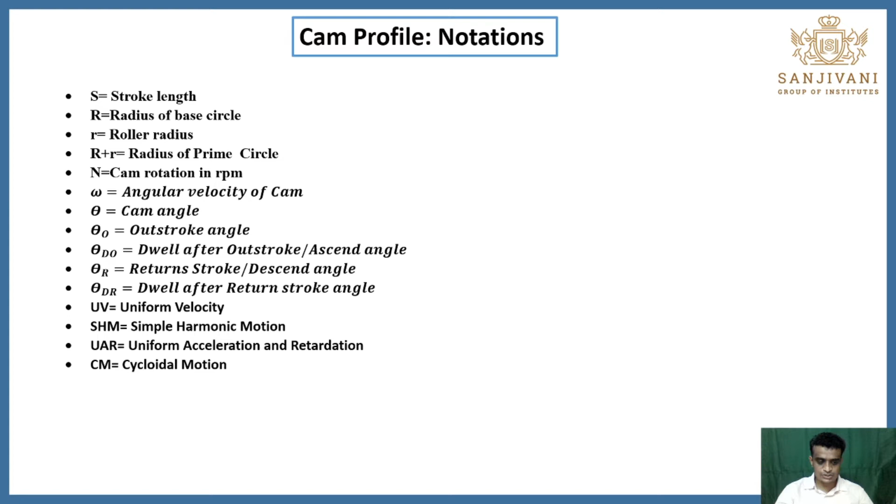These are some notations: UV means uniform velocity, SHM is simple harmonic motion, UAR means uniform acceleration and retardation, and cycloidal motion is CM. Now we'll start with the cam profile for the knife edge follower. According to the follower, we need to design the cam profile. In this case, our task is to draw the cam profile for the knife edge follower.

Now we'll read the problem statement. You have to read the problem statement very carefully. A disc cam is to give simple harmonic motion to a knife edge follower during outstroke of 50 mm. Outstroke means this is the stroke length of 50 mm. The angle of ascent is 120 degrees. Dwell after the ascent is 60 degrees. Angle of descent is 90 degrees. And the remaining you need to calculate, which is the dwell after the descent.

The minimum radius of the cam is 50 mm. That means this is the base circle radius, which is capital R. Draw the cam profile when the axis of the follower passes through the axis of the camshaft. That means this is a radial knife edge follower which passes through the center of rotation.

Here we also need to calculate the maximum velocity and acceleration during ascent and descent. That part we are not going to focus on; our task is to draw the cam profile. But you need to concentrate on this also. We already studied this part while studying follower motions. One thing you have to keep in mind while using these formulas for Vmax: theta O and theta R have to be taken in radians.

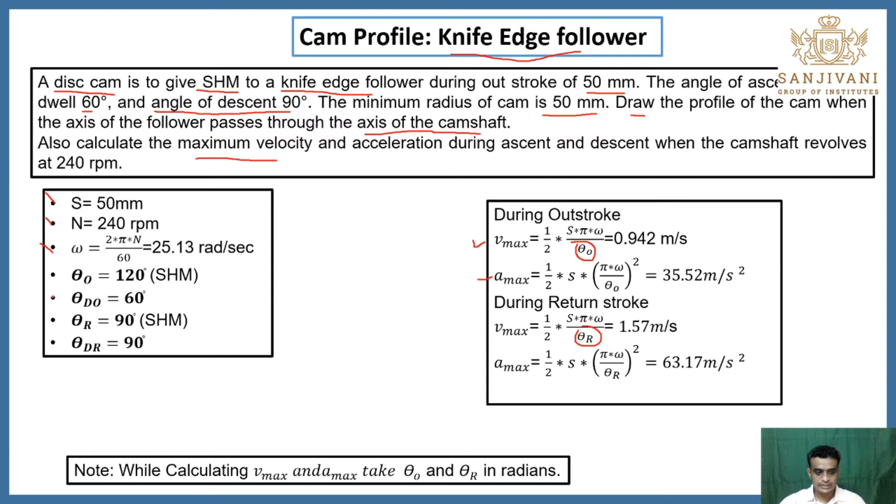Next you have to write down the given data: angular velocity, theta O, theta do, theta r, and theta dr. Using this you have to draw the displacement diagram, which we already studied, using simple harmonic motion: 120 degrees, theta O, theta r, theta dr on the cam rotation axis, and the vertical axis is the stroke length. Now we'll start the procedure. Watch this very carefully. It is very simple. If you get this, you'll definitely know how to draw the cam profile.

First you have to draw the center O. Next you draw a circle, the base circle, whose radius is equal to 50 mm. Next draw a vertical line through this point. Next draw the knife edge follower, because its line of action passes through the center of rotation. Now we have to divide this circle into four parts, taking the vertical line as the reference.

While dividing, we are taking the angles in the anti-clockwise direction. That means first in the anti-clockwise direction we take 120 degrees, next 60 degrees, 90 degrees, and 90 degrees. Keep in mind, in this case we are assuming the cam is rotating in the clockwise direction. In that case you have to take these angles in the anti-clockwise direction. If you assume the cam is rotating in the anti-clockwise direction, then you have to divide the circle into the four parts taking the angles in the clockwise direction.

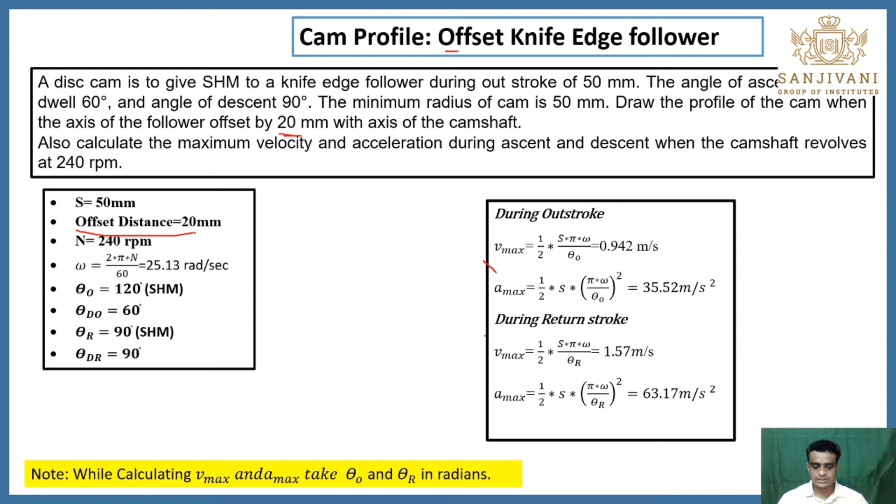Again, according to the available space constraint, we need to take this offset knife edge follower. Okay. Again, in this case we need to find out the maximum velocity and maximum acceleration. For that part you have to use these formulas. Only one change that we need to take, which is the offset distance of 20 mm. Okay. Now again here we have considered the follower motion with the simple harmonic motion. By following that procedure, we have drawn this displacement diagram. Now I will just draw this cam profile.

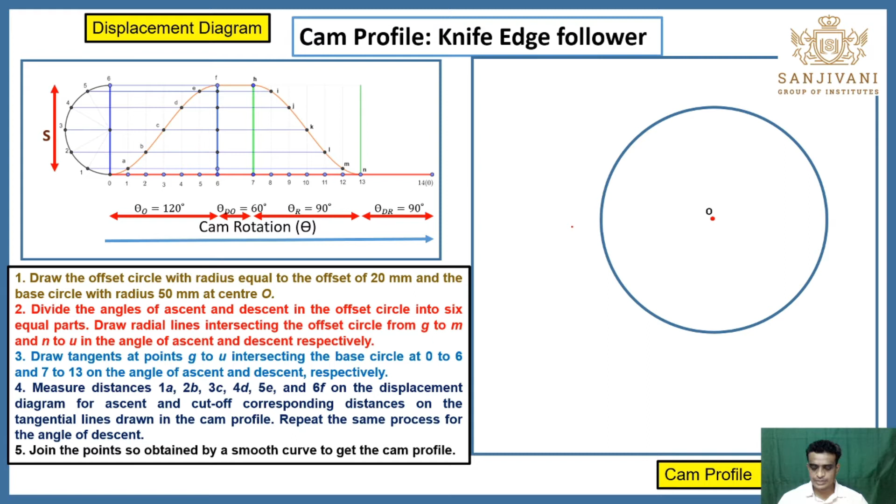Also I will just mark the center, which is O. Next I will draw the base circle. Next I will draw the offset circle whose radius is equal to 20 mm, which is given, and this is the offset circle. Now at this point I will draw one vertical line which must be tangent to this offset circle. I will just mark where it intersects the base circle. That point you need to mark. At that point you have to draw the knife edge follower just like the previous condition. Now you have to join this marked point with the O. Okay. Now this is your reference line.

With that reference line you need to divide this base circle into the four parts: theta O, theta dO, theta R, and the theta dR, last part. In this case also we are assuming that cam rotates in the clockwise direction. That's why we have taken this angle in the anti-clockwise direction. Okay.

Now again you have to divide this theta O into the 6 equal parts by taking this line as a reference. This is the first part, theta O into the 6 equal parts. Okay. Again you need to divide this theta R into the 6 equal parts, because here we have divided theta O into the 6 equal parts, theta R into the 6 equal parts. Same procedure we have to follow while drawing the displacement cam profile.

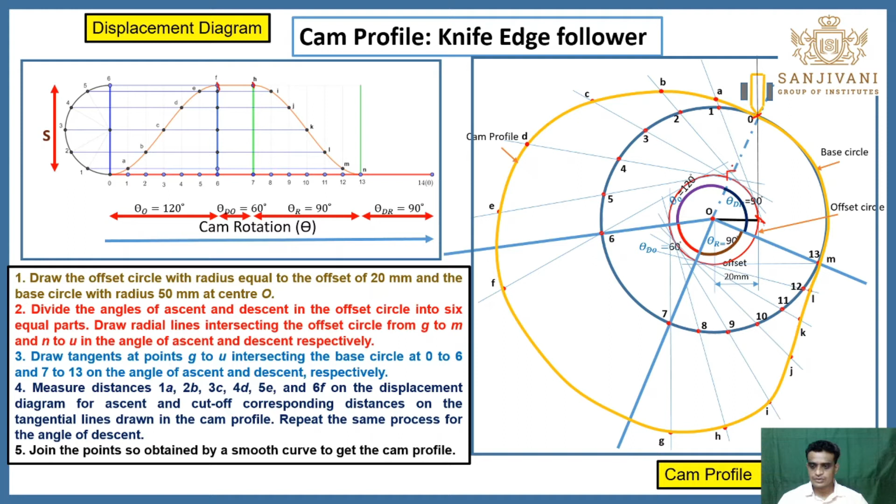In this way, you need to draw the cam profile for the offset knife edge follower.

Now we'll consider the cam profile for the roller follower. If we have the space available and if you want to reduce the wear, we use the roller follower instead of the flat knife edge follower.

In this case, if you read the problem statement, a cam of base circle of 50 mm wish to operate a roller follower of 20 mm diameter. That means radius of that roller is of 10 mm.

The follower is to have simple harmonic motion. The angular speed is 360 rpm. Draw the cam profile for a cam lift of 40 mm, that stroke is of 40 mm.

Angle of ascent is 60 degrees. Angle of dwell after ascent is 40 degrees. Angle of descent is 90 degrees. And again there is a dwell that we need to calculate. Also calculate the maximum velocity and acceleration during ascent and descent.

Sorry for this change. That theta O is of 60 degrees, theta DO is of 40 degrees, theta R which is again 90 degrees with the simple harmonic motion, and remaining angle which is the dwell after the return stroke. There is no follower motion, that's why no need to consider this.

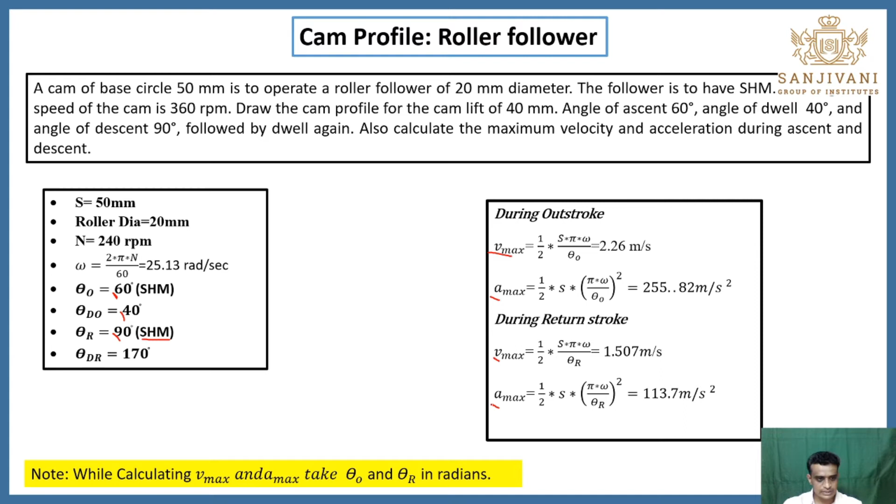Now we are going to draw the cam profile. Again you have to draw the displacement diagram with simple harmonic motion. Theta O, theta DO, theta R and theta DR will be given, and as per the simple harmonic motion you have to draw that displacement diagram.

Now we are going to draw the cam. Mark this point O. Next, draw one base circle. Through this point, draw one vertical line. On this vertical line, mark the distance base circle radius plus roller radius. You get this point. Through this point, draw the roller. This is O1 actually.

Next, through this center, mark the prime circle. This is the prime circle whose radius is equal to base circle radius plus roller radius. Now this is the base circle.

Now just divide with reference to this vertical line. Here we need to divide this prime circle into four parts with theta O, theta DO, theta R and theta DR. From this vertical line we take that angle in the anti-clockwise direction, because here we are assuming the cam is rotating in the clockwise direction. If you assume the cam is rotating in the anti-clockwise direction, then you need to take this angle in the clockwise direction. Now this is theta O, theta DO, theta R, theta DR.

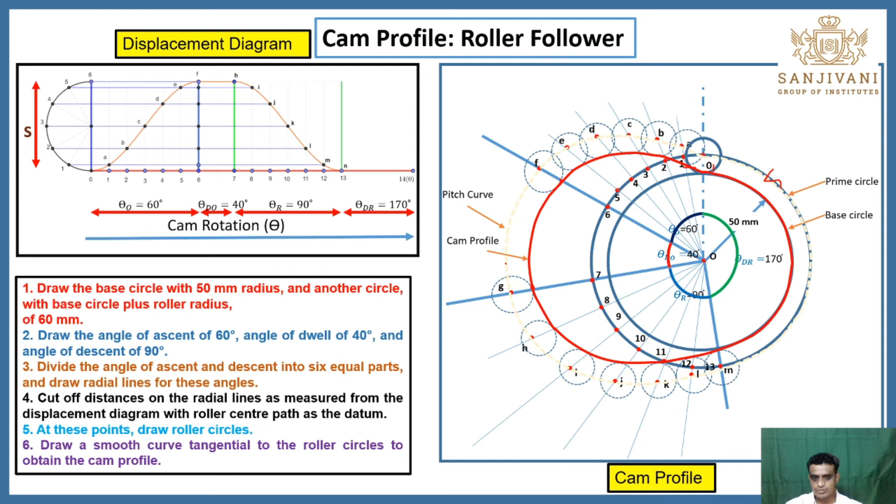Again you have to join points A, B, C, D, which gives you the pitch curve. In this way you need to finish this cam profile and give the proper notations and nomenclature. You will get good marks.

Now we are going to draw the offset roller follower. The problem statement is: a cam with 60 mm minimum diameter, that is 30 mm radius, with 20 mm lift, meaning the stroke length is 20 mm, rotating clockwise at uniform acceleration and retardation with 1200 rpm, has to give the following motion to the roller follower with 10 mm diameter, that means the roller radius is 5 mm.

Next, outstroke: the follower is to move outstroke for 120 degrees with uniform acceleration and retardation, then dwell for the next 60 degrees, then return during 90 degrees. Nothing else is mentioned, so you have to consider uniform acceleration and deceleration, and dwell during the remaining period. Again draw the cam profile if the cam axis is offset by 20 mm from the follower axis, meaning the offset distance is 20 mm and roller diameter is 10 mm.

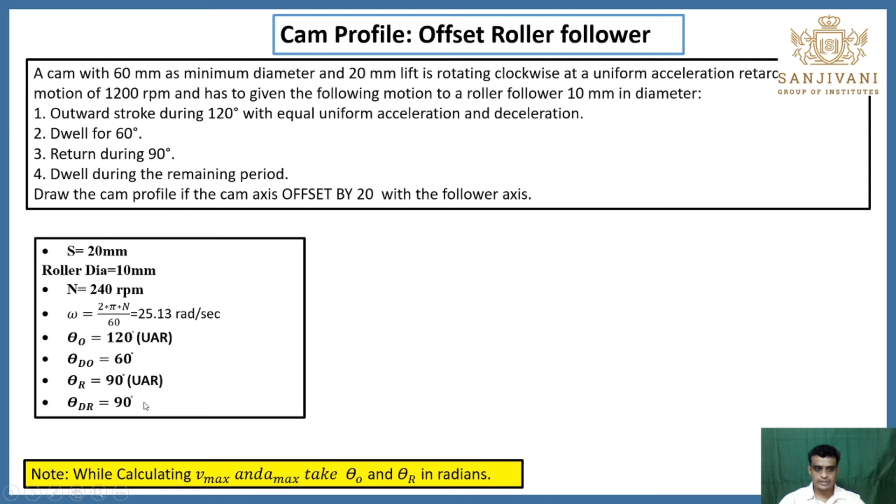Now we have to draw this cam profile considering all this data. The stroke length is given accordingly. By using the uniform acceleration retardation motion, you need to draw the displacement diagram. Next, after drawing this displacement diagram, we need to draw the cam profile.

Again you have to mark the center point O. Next you have to draw the base circle whose radius is equal to 30 mm. Next you have to draw the offset circle whose radius is equal to 20 mm. Now through this point you have to draw one vertical line and mark this point.

Next you have to consider the radius. On this vertical line you need to consider the radius of the roller in such a way that the roller is tangent to the base circle, and mark this point. After marking this point you have to draw this circle. Next, through this point you have to draw the prime circle. This is the prime circle.

Okay, now after drawing this prime circle, taking this as a reference, you have to divide this prime circle into four parts. This is the first part, second part, third part, as we divided into theta O, theta DO, theta R, and theta DR. These angles are 120 degrees, 60 degrees, 90 degrees, 90 degrees.

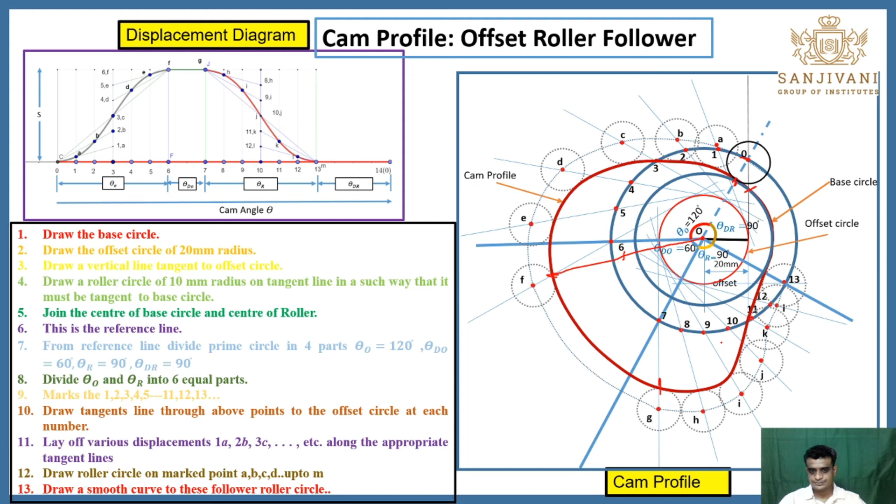Now we are going to draw the cam profile for the flat face follower. In this case we need to draw this with the cycloidal motion. A flat face reciprocating follower has the following motion with cycloidal motion: angle of ascent 80 degrees, angle of dwell 80 degrees.

Return stroke 120 degrees, and remaining is again 80 degrees. Base circle diameter is 60 mm, stroke length is 50 mm. The line of motion of the follower passes through, that means this is the radial follower.

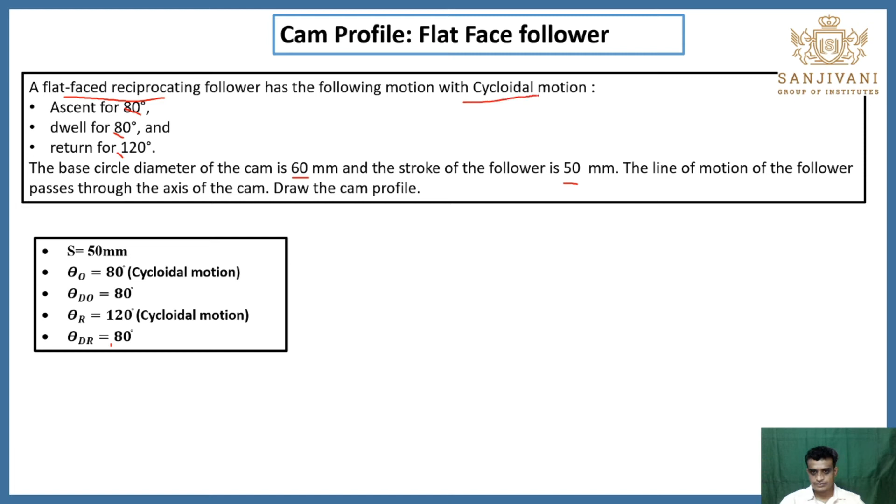Now we need to draw the cam profile for the flat face reciprocating follower with cycloidal motion. Now we'll start to draw the cam profile.

Before starting, we need to draw the displacement diagram using cycloidal motion. You need to draw that displacement diagram by taking the circle, radius of the circle equal to r is equal to s upon 2 pi, where s is equal to stroke. You need to consider this and follow the procedure of the displacement diagram, that video I have already uploaded.

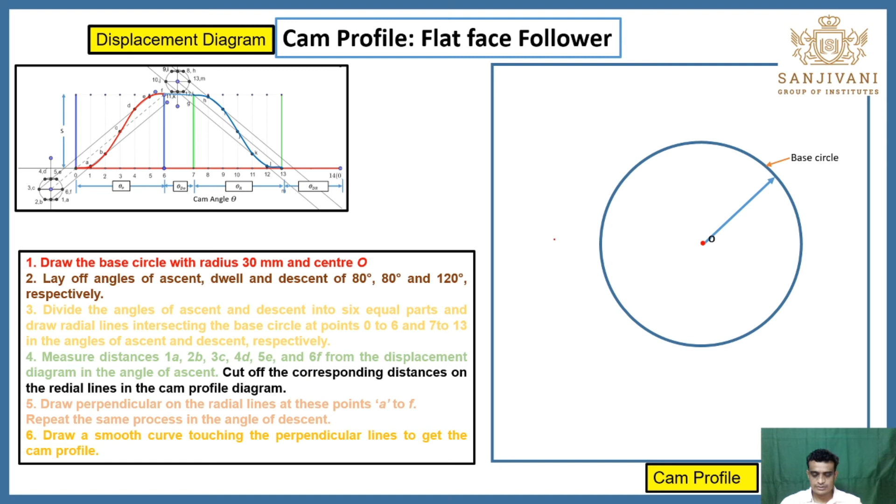Now we'll start to draw the displacement cam profile. First of all, you have to mark the center, draw the base circle equal to 30 mm. Next, here you have to draw that...

Next, again from this vertical reference, you need to divide this base circle into the 4 parts: one is the outstroke angle, next one is the dwell, next one is the return stroke, and again dwell. Now, just like this, here we have divided this into 6 parts and return stroke into 6 equal parts. Again here also you need to follow the same. You have to divide the outstroke angle into 6 equal parts and return stroke into 6 equal parts.

Okay, next, these equal parts you need to join, or before that you have to give the notations. Now you need to join these parts with the center. You have to draw the faint lines on these points. Now you have to mark these distances 1a, 2b, 3c like this. After marking these points you have to give the notations a, b, c, d that we have already mentioned over here.

After marking these points, now you have to draw the flat face, in such a way that it must pass through this point A, but perpendicular to this line OA, OB, OC like this. You need to draw this line such that it must be perpendicular to these extended lines, that means O to B. Just like this. I think these are not visible, but just try to understand this by the yellow lines.

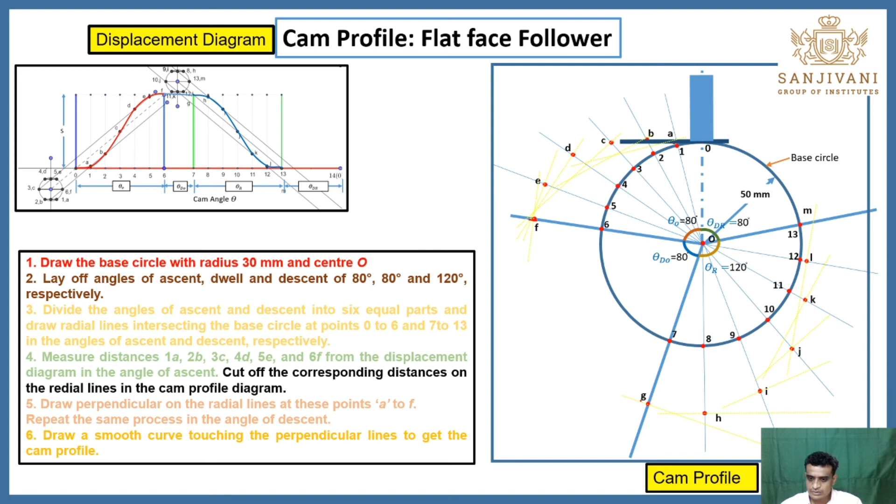You have to draw this line perpendicular to OA, OB, OC, OD, OE, OF, OG, OH, OI, OJ, OK, OL, and OM. Next, in the last step, you have to draw the cam profile in such a way that this profile must be tangent to all these follower positions, and for this portion, you have to take this distance in compass, draw one circular arc, and complete the cam profile.

Okay, this is the overall method to draw the flat face follower. Just concentrate on this follower position. This must be perpendicular to OA, OB, and all these positions.

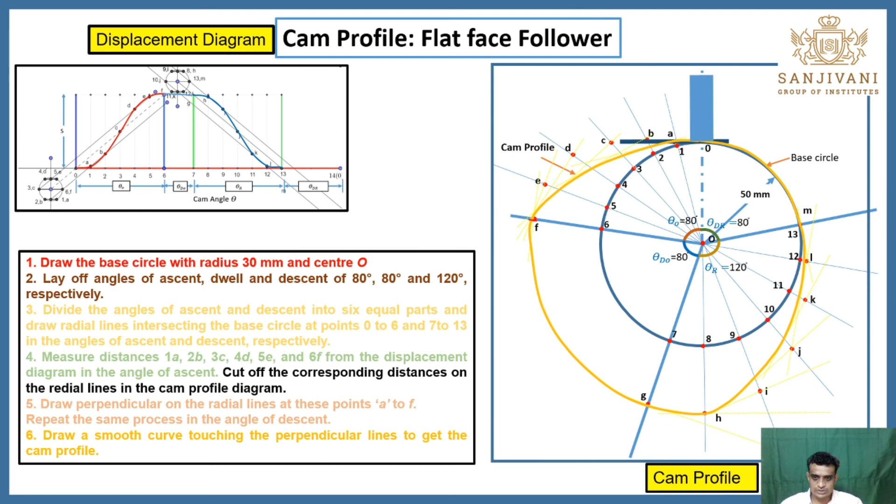Next, the last profile is the cam profile for the oscillating roller follower. In this case, a cam operating an oscillating roller follower having uniform velocity. Draw the cam profile for the given data below. The roller center from the cam center at the beginning of ascent is 60 mm. I will explain to you the meaning of this distance.

Minimum radius of the cam is 40 mm, that means base circle. Next, dwell is 40 degrees. Angle of ascent is 90 degrees, and angle of oscillation of the arm during ascent and descent is 15 degrees. Right now we have just read the problem statement. What is the meaning of this oscillating roller follower?

The oscillating roller follower is one of the types of cam and follower where rotary motion is converted into oscillating motion like this. Now in this case, the total angle during ascent and descent is 15 degrees. And the length of the arm is 80 mm.

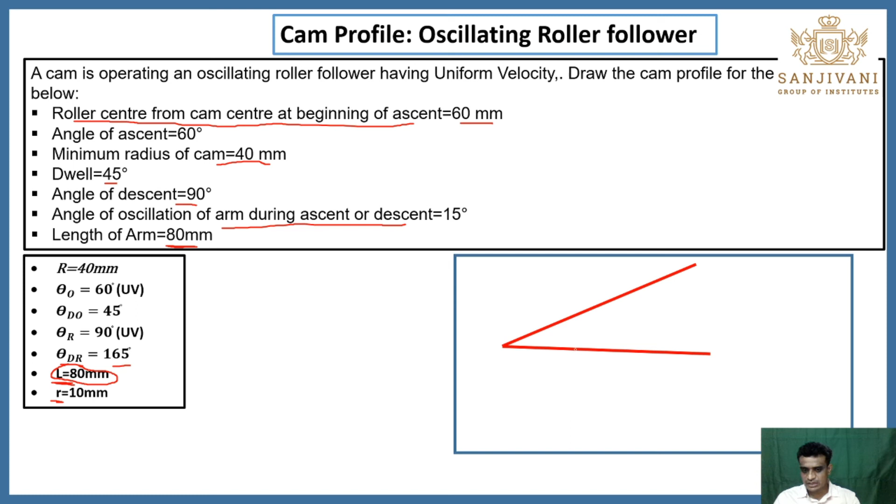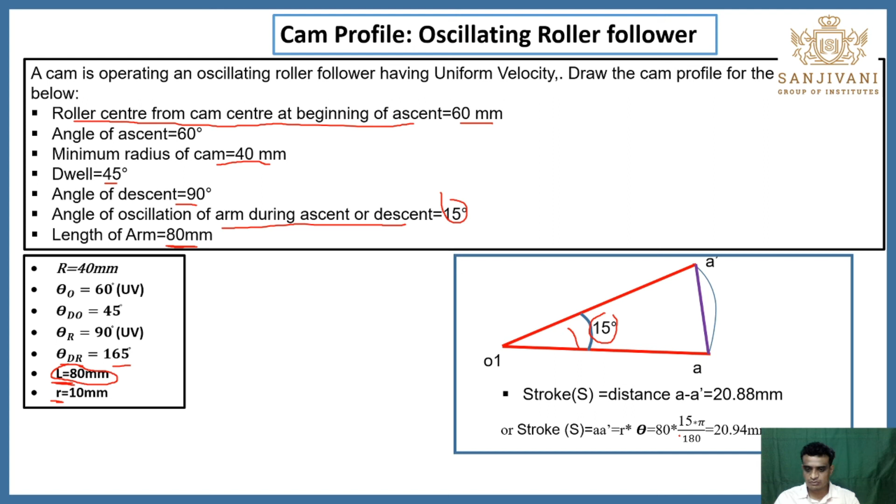Draw this arc and measure this distance A A dash, which is equal to 20.88 mm. This is the total stroke of this oscillating roller follower, which is given in terms of degrees, but while drawing the displacement diagram we require the stroke, calculated using this method. Or with the second method, you can calculate the stroke just like the arc length. Now we are going to draw the cam profile for the oscillating roller follower.

In this case, first we need to draw the displacement diagram, using the uniform velocity. The stroke length is given, which we have calculated. According to that, from the given data we have drawn this displacement diagram. Next task is to draw the cam profile. Here you'll find that all these details are mentioned over here.

I'll just draw. First of all, we need to mark the fixed point O, which is the center of rotation of the cam. Next we need to draw the base circle. Next we need to draw the vertical line. On this vertical line we need to draw the prime circle. The prime circle radius is equal to base circle radius plus roller radius, because in this case this is the oscillating roller follower. That means we need to add the radius of the roller.

Next we need to draw the pivot circle. For this pivot circle, the center distance between the center of rotation of the cam and the pivot is given to us. According to that we need to draw the pivot circle. After getting the pivot circle, we also know the length of the follower, but we don't know the exact location of the pivot.

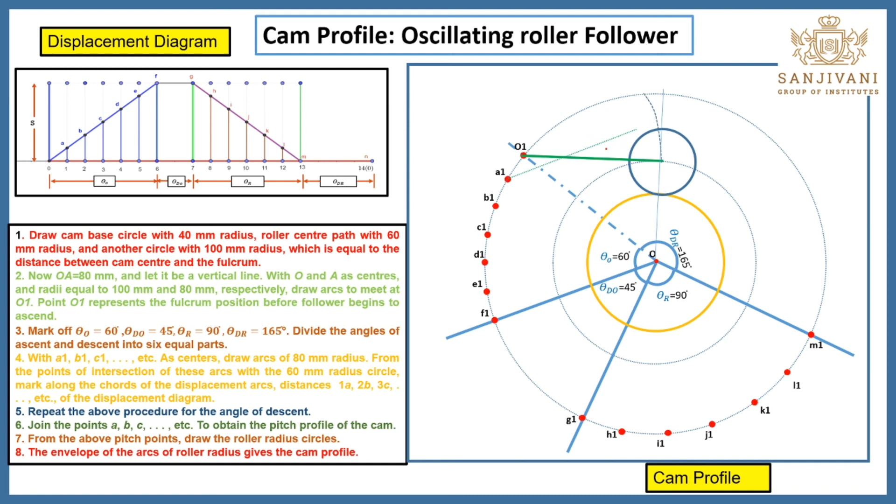You need to divide this prime circle. Up to F1 you need to draw these arcs. Next, after G1, H1, like this you need to draw the arcs. After marking these arcs, next task is to give the naming 1, 2, 3, 4, 5, 6, 7, 8, 9, 10, 11, 12, 13, last one is 14. After marking these points, next task is to mark the A, B, C, D distances.

You have to take the 1A distance into the compass, put the pivot point of the compass at this location, and mark the point A. Just like this you have to mark the points B, C, D, E by placing it on the respective points. After getting these points, just like the roller follower, you need to draw the roller circles at points A, B, C, D, E, F, G, H, I, J, K, L, M, like this.

After marking all the circles, again just like the roller follower method, we need to draw one line which must be tangent to all these circles. In this way you draw the cam profile for the oscillating roller follower. In this case you have to give the notations: base circle, prime circle, pivot circle, pitch circle.

In this way we started with the knife edge follower and we end with the oscillating roller follower. In this session we learned the radial knife edge follower, offset knife edge follower, radial roller follower, offset roller follower, flat face follower, and last one the oscillating roller follower. In this way we learned all the types of cam profiles with different follower motions and different followers.